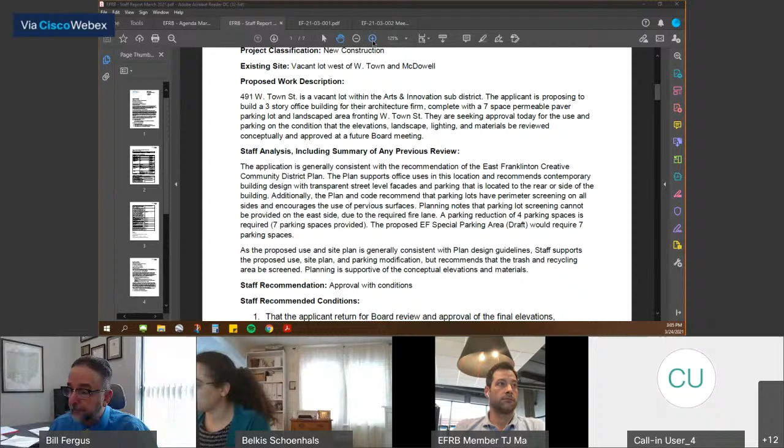The applicant is proposing to build a 3-story office building for their architecture firm, complete with a 7-space permeable paver parking lot and a landscape area fronting West Town Street. They're seeking approval today for the use and parking on the condition that the elevations, landscape, lighting, and materials be reviewed conceptually and approved at a future board meeting.

So if we look at the materials here. Okay, so this is the site along West Town. You can see there's a little alley there, and then right next to the alley is the lot with some mature trees in the background.

So they're proposing to take away some of those trees to make room for the development. They did have an arborist go out to the site to see if any of the trees would be feasible to be saved, but unfortunately, with the construction of the parking lot and the construction equipment, it would actually hurt the root system and they can't be saved. Also some of those trees are invasive species, so we assessed that in this case it's all right if they are removed and not saved.

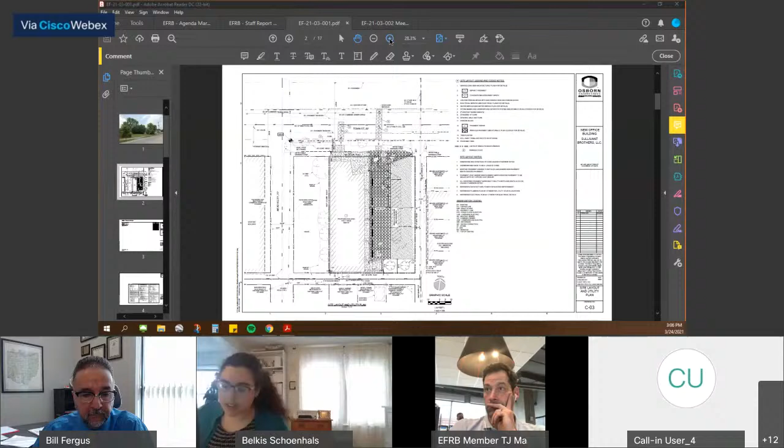Could we go to the updated site plan, please? Great, and then can we zoom in on the footprint? Awesome, great, okay cool. So on the left-hand side there you'll see the outline of the office building, and then on the right-hand side, with kind of that square pattern, those are the permeable paver parking lot spaces.

Essentially, folks can come in off of the alley and park on the side there. And then you'll see a little square pattern triangle fronting Town Street, and that's going to be a landscaped area with some trees and a bicycle parking rack. Can you scroll down a little bit, Nolan, so we can see the southern portion? Yeah, and then in the rear there of the parking lot, you'll see 2 new trees that are going to be planted just for some screening and buffering.

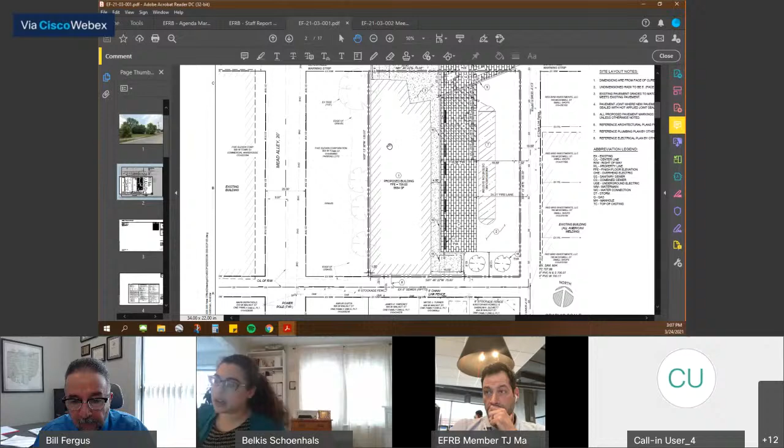And then can you go to the drawing set, please? Great, and then if you could go to the floor plan.

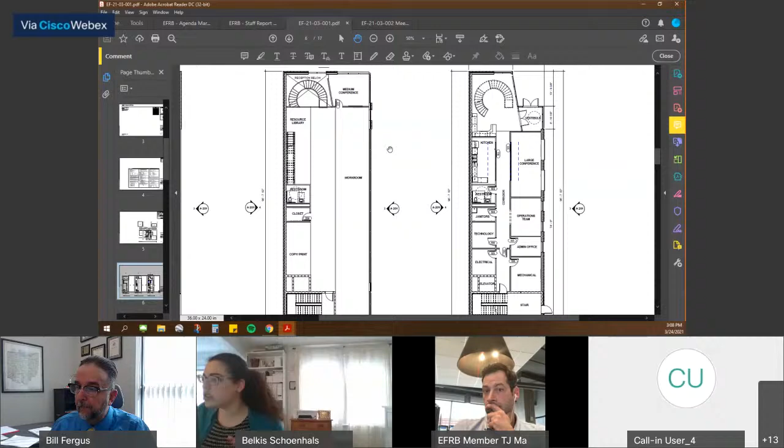And keep going. Yeah, so these are the floor plans. It'll be a first floor, second floor, and then like a mezzanine level. So you can keep scrolling through.

Great. Okay. Perfect. And then can you zoom out so we can see the whole page?

Great, so here are some views and elevations. And again, these elevations and materials are still conceptual at this time. What the board is voting on today is just the site plan, so that would be the parking and the use. And then can we go to the last page?

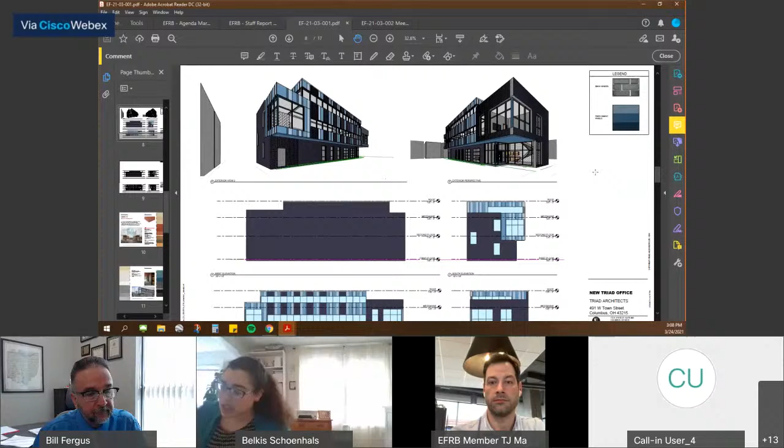Great, and then here are the other elevations as well.

Thank you. So after review, the application is generally consistent with the recommendations of the East Franklinton Creative Community District Plan. The plan supports office uses in this location and recommends contemporary building design with transparent street level facades and parking located to the rear or side of the building.

Additionally, the plan and code recommend that parking lots have perimeter screening on all sides and encourage the use of pervious surfaces. Planning notes that the parking lot screening cannot be provided on the east side due to the required fire lane, and a parking reduction of 4 parking spaces is required.

7 parking spaces are provided, and the proposed East Franklinton special parking area draft would require 7 parking spaces.

As the proposed use and site plan is generally consistent with the plan design guidelines, staff does support the proposed use, site plan, and parking modification, but recommends that the trash and recycling area be screened.

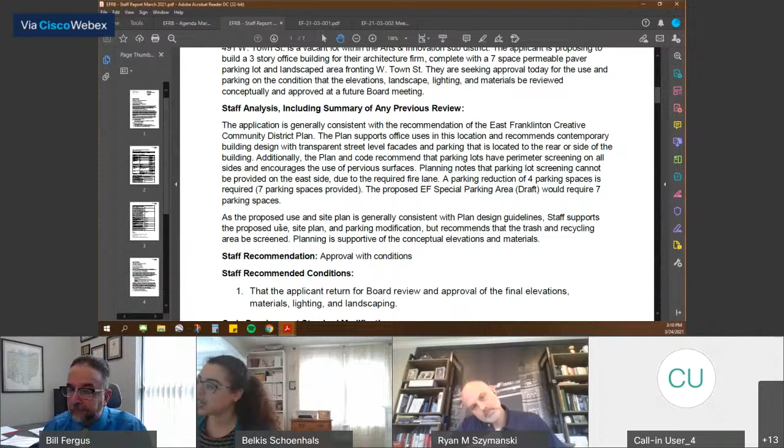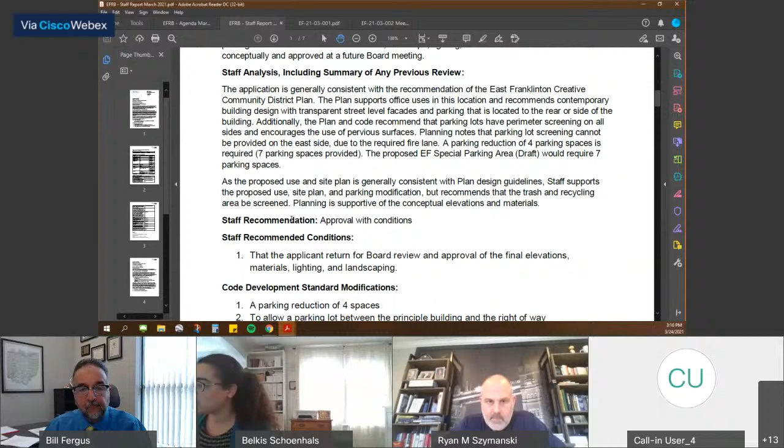Planning is supportive of the conceptual elevations and materials, and staff recommends approval with conditions, with the condition being that the applicant returns for board review and approval of the final elevations, materials, lighting, and landscaping.

Some code development modifications that would be approved if the board approves this today would be a parking reduction of 4 spaces to allow a parking lot between the principal building and the right-of-way, to allow no parking lot screening to be provided on the east side of the parking lot, and to allow building frontage to be less than 60% of the frontage.

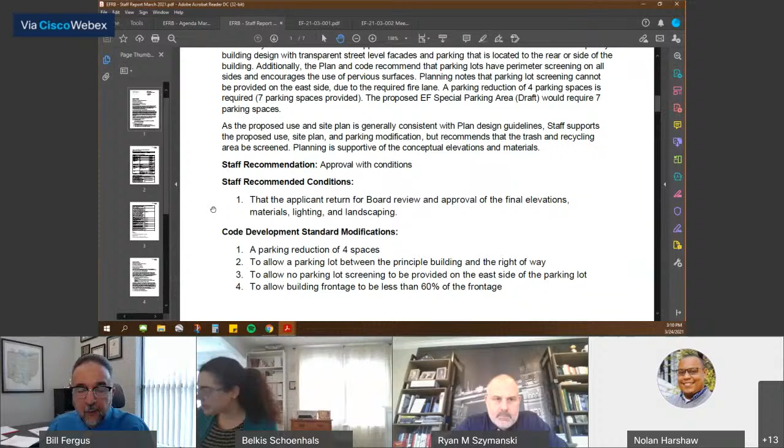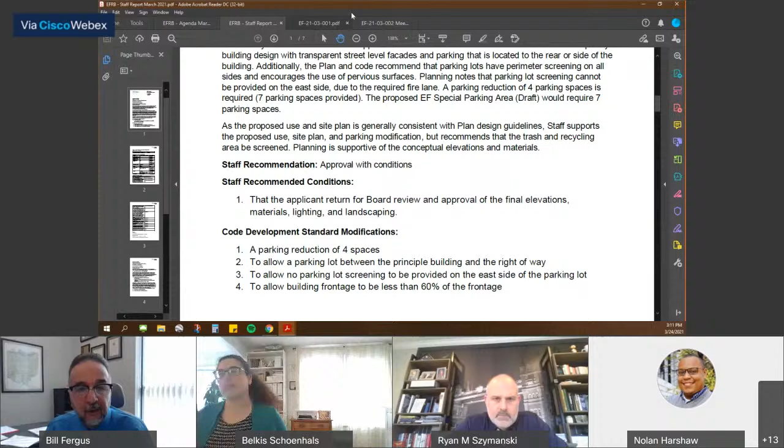Yes, this is Kevin Kindy on behalf of Triad Architects. This is Kevin Kindy from Triad Architects.

Are you the only one who's going to testify today? We have Brent Foley from my office as well, but he's here more on the owner's hat, if you want to call it that. I'm sitting here on the applicant and architect hat. My business partner Zach's here. Maybe we should just go ahead. You're going to swear us in just in case, is what I'm getting at, right?

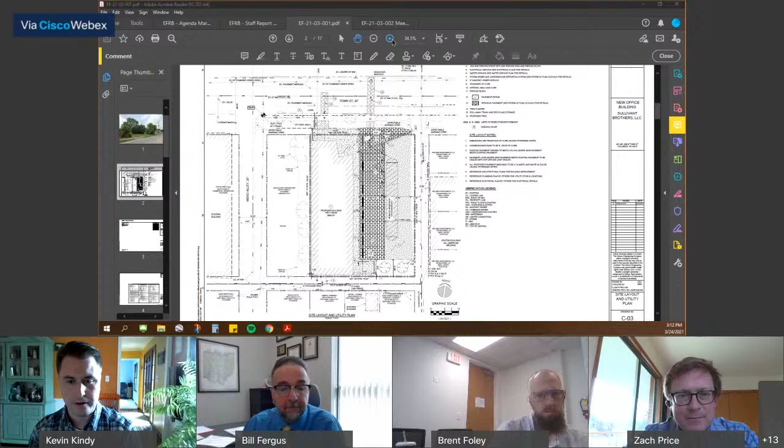I think the only question that I had at first on one of the conditions, I don't think it was necessarily a condition, but it was a recommendation to screen the trash area.

So on our site plan, it's shown kind of generically, it wasn't called out very explicitly, but we do have a dashed line box with note 15 at the south end of the site there.

Our intent is to have that be basically a small fenced in area. We're not planning on a dumpster because we don't generate that much trash as a business. We're planning on rolling containers similar to what residential would use, probably 2 trash, 2 recycling. So not a huge enclosure, but we are planning on screening it in that fashion.

So our question in relation to that is just whether or not that would be deemed acceptable. And then the other point I'd like to make is we are currently showing, and the site plan reflects, pervious unit pavers for the parking stalls.

We're currently working through some budget review with a contractor that's currently about a $20,000 add overall for this project, and we're currently over budget. So we're looking at kind of a base bid scenario of doing the entire parking lot out of asphalt, with an alternate, if we can afford it, to use the porous unit pavers in the parking stall area.

It's definitely our desire to do so. It's just whether or not it's more of a want than a need at this point. If we can afford it, we definitely would like to do it, but ultimately we've got to make the whole budget work. And I think those are the only 2 things I've got at the moment.

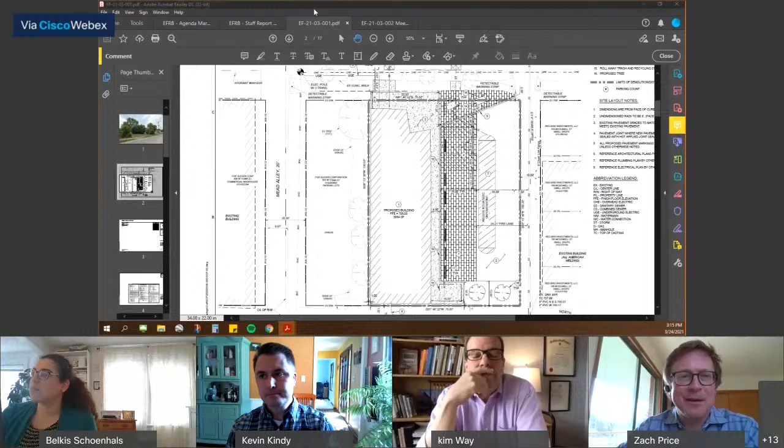Yeah, okay, I can answer some of that. This is Zach Price. We purchased this property about 6 years ago as a bit of an impulse buy. We were interested in Franklinton as an area of Columbus to do a project, and looked at numerous different uses for this property, none of which really made economic sense until we needed more office space for ourselves. So to answer your question about fronting the building completely on Town Street, we did look at that. However, we felt it wasn't going to result in as much usable square footage for us on the site and wasn't going to increase our parking count.

So it was less favorable than this current situation. It would have made it easier to front the entire building on Town Street had we been able to acquire the corner lot on Mead Alley and Town Street there. Over the years we've had numerous conversations with that property owner, and it's a very complex ownership arrangement—that owner also has that property commingled with properties to the west on the next block. So it really just was not something we could acquire, unfortunately.

Yeah, that's the part I guess I have the most issue with—I would love to see that be a consistent edge along Town Street, but I understand you've got a site and you've got constraints.

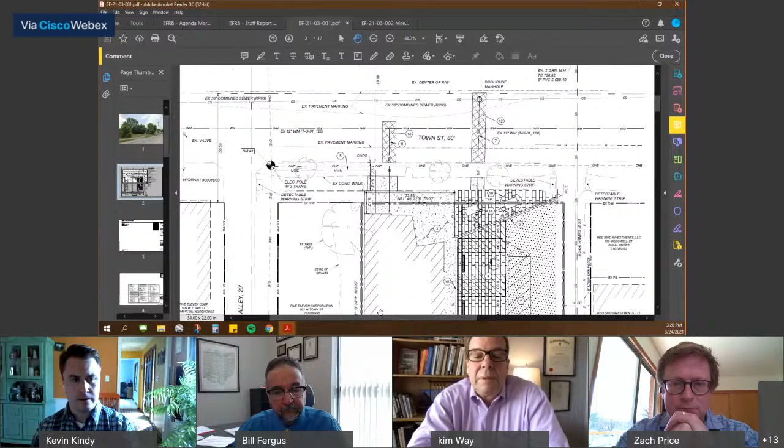Yeah, that's a good question. I think that was a similar comment, not necessarily a condition, but it'd be great to get more feedback on what the EFRB would require for landscape screening. I'm assuming that's what we'd probably be looking at doing there. Like I said, we do have two trees, but I know that's not necessarily the opaqueness that's desired. So I think we're open to discussion on that.

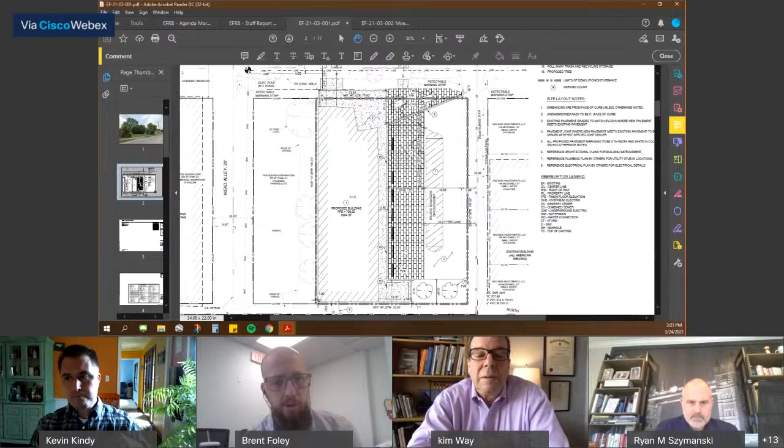Kim, if I could interject something to help you understand how we intend to use some of the parking lot in an additional way. Along the east side of the building, in our conference rooms and front ground floor area, we intend to have glass garage doors that open up to the parking lot. That's why we were interested in doing permeable pavers on that portion, so during things like Franklinton Friday we could close our parking lot off and have events, plugged into what's going on in the community. So I think we should consider whether that plays into whether there should be too much opaqueness in that screening, to have it be inviting.

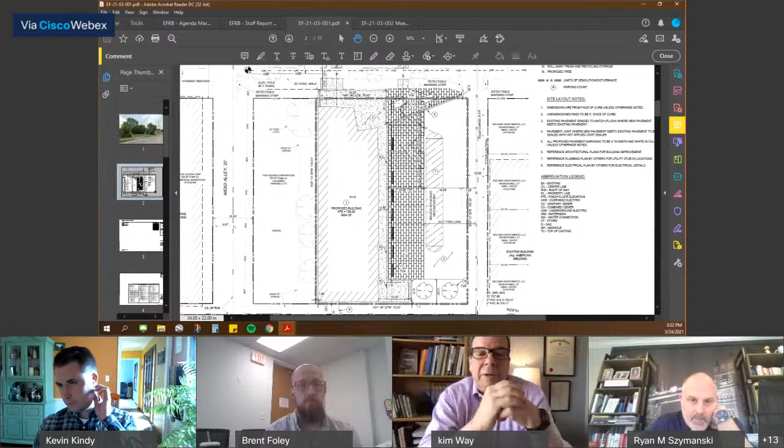I just think it would be a really interesting move to almost pick up on that entrance angle and extend that as a wall across to screen the parking, and give some enclosure to that front plaza, while also screening the cars. I don't think you're totally closing off the space—I think it could still be used, but it might give that architectural continuity that I'm kind of missing.

Yeah, it seems like they're sort of doing it. You're sort of doing it. I mean, we're not really talking about the design of the building other than the footprint, but the idea that the entry is at the end of that canted wall—it could be nice as a screen wall or signage, but that's for development, right? Yeah, that's what I'm saying, Bart. Yeah, I mean, I get the angled wall trying to line up with the angled entrance.

Yeah, and Ryan, even the trees in the back that are shown there, I don't know what they're doing. That's the alley, right? I'd rather push everything back to the alley and pick up more usable space on Town Street, like you said, and really treat that as a nice little urban space, and screen the cars.

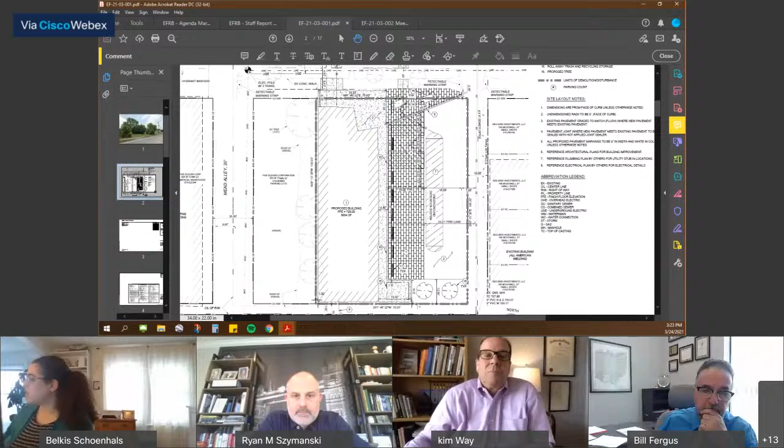Yeah, I think we could look at moving it back. We'd have to figure out how the trash enclosure works, because that's obviously something we don't want up near Town Street. But if there's room for it in that southeast corner, that might work.

But I'm just wondering, that trash enclosure looks like it's two wide by two deep. I wonder if it could be longer, so you're pushing those rolling bins into there, which allows you to get the space you need to push down a little bit. It might only get you a few more feet, but it looks like you have plenty of space within that parking field.

We are certainly open to these continued conversations. For the purposes of our approval today, I just want to clarify: if we get approval of the parking number and the use, we'd be happy to continue to tweak those things with you guys when we come back for the building elevation.

This is staff, just to jump in here and contribute. Staff fully intends and supports screening on the West Town Street frontage as well as the rear of the parking lot. The only modification we're proposing is for there not to be screening on the eastern portion of the parking lot where the fire lane is, but we fully intend on screening being on the front and rear of the site. They are going to come back at a future date for landscaping, and that's where we would expect that screening to be shown in detail.

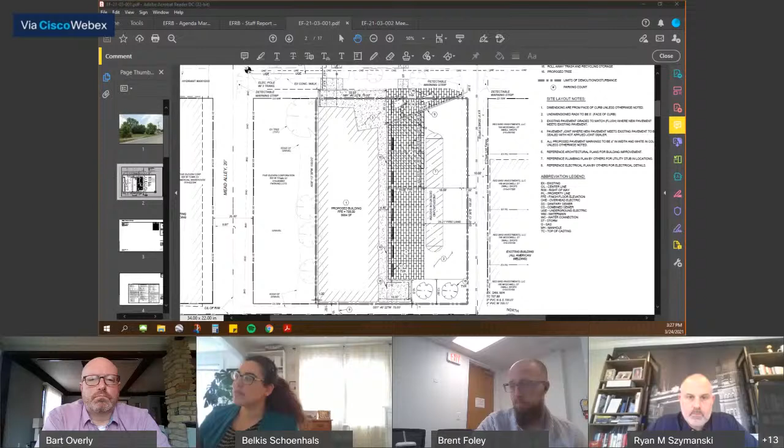So effectively, we would be giving preliminary approval to the site plan. Correct, yes, to the site plan, and so that's the use and the parking count.

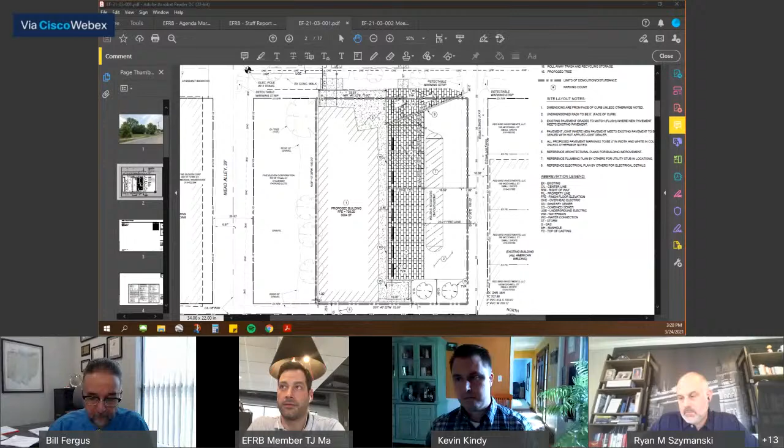Are you planning on designing your underground detention system with the assumption you are not going to have permeable pavers? And then if you do, all the better? Likely, yes. The amount of permeable won't be as big a change in this instance for this size lot, so that's probably how it's going to go.

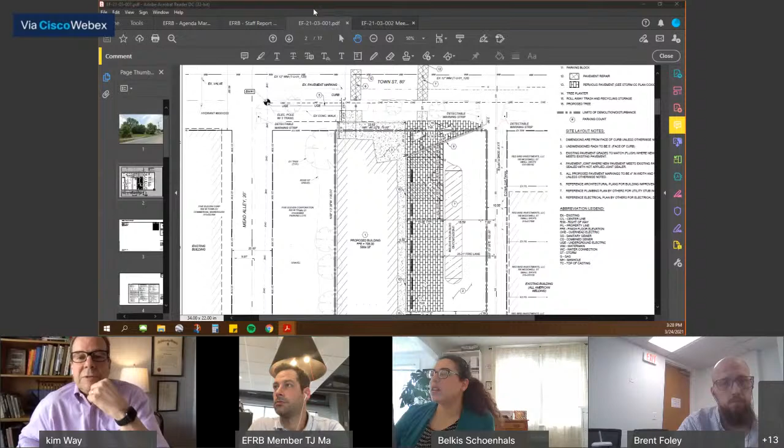So Belkis, I just had a question about the parking. I noticed in the documents online there was a graphic showing additional parking over in the parking garage owned by the development down McDowell Street, River and Rich. Is that correct? So the plan is that they have spaces in another parking facility.

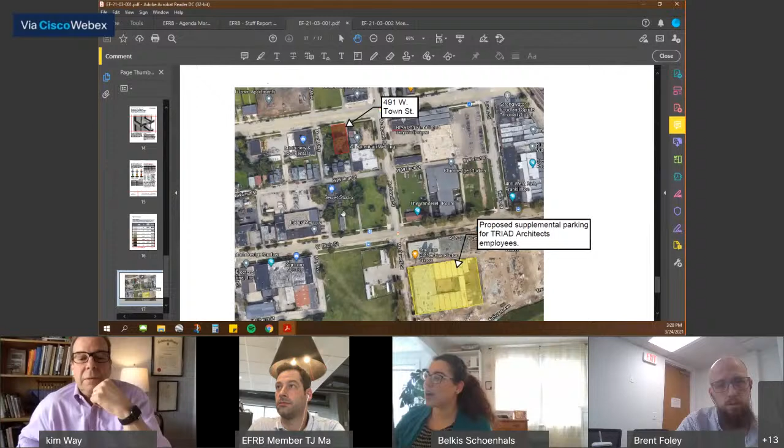Proposed supplemental parking. To my knowledge, the applicant was just pointing out a different parking option. I am not aware of any specific spaces reserved for Triad in that parking garage. I think they're just showing where parking is close by, but the applicant could probably clarify that.

Yeah, I can jump in, and maybe Zach can too, but that's our intended location for any additional parking we need for employees right now. We would negotiate that with them. There's also the Gravity site that's a little bit farther away and across Broad Street, and there's conversations about the site on the other side of the railroad tracks that could be potential. We're working through that—we kind of prefer this one for our location, but we can't guarantee that yet because we're not in an agreement with them yet.

So Brent, you're looking to have reserved spaces specific for Triad in one of those locations? For employees, correct. The site and the parking spots on your site would most likely be for guests and clients coming in. Correct.

So where I was going with that question was, if you had one less parking space on site and could pick up some more outside area, if it helped you with wiggle room to make things work right, that would be something else the board could discuss, but I'm not proposing that.

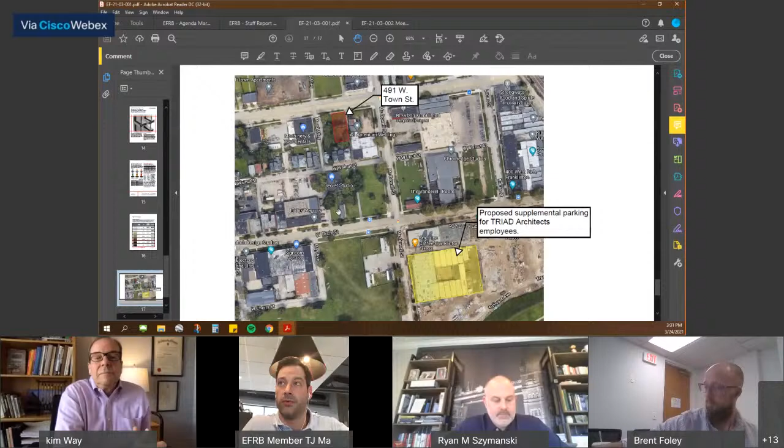Kim, that's a great point. When do approvals need to necessarily happen for parking, the city's buyback program for parking spots? When does that go into effect? The East Franklinton special parking area?

Correct. So that passed Development Commission. I believe it's going to go on to City Council in April, but they have to do 2 readings before it goes into effect. I'm not sure if it's 2 readings over 2 months or within 1 month, but I'd say that program might take effect by the end of April or May.

But I would need to touch base with Jackie Yeoman on the exact timing of that. She's the go-to.

So if we were to approve a reduction of 4 spaces today or 5 spaces today, there's no cost involved, despite the fact that their site plan has not been officially approved and the building itself hasn't been approved, but they'll be kind of grandfathered in over the next few months now that they've reached out to us and had our approval on parking.

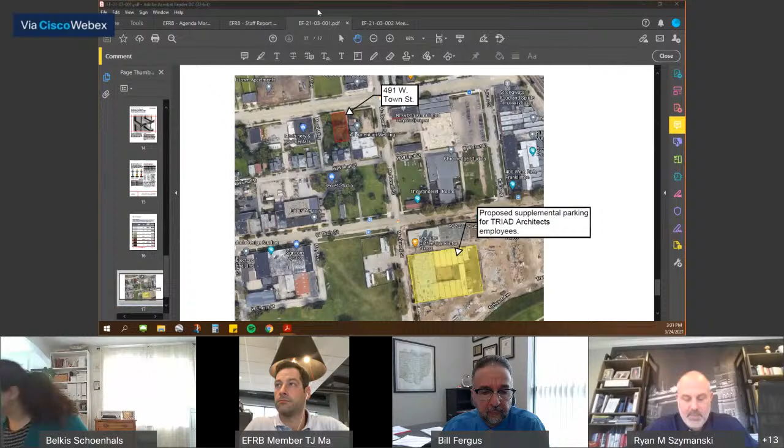That's correct. I guess I'd prefer to see the 7 in line with the East Franklinton plan. There's plenty of room up front there and in the back, in my opinion, to get proper screening and landscaping, and set precedent of already reducing from that East Franklinton plan when there's a plan in place that can meet it. I'd prefer to see it kept at 7.

But that's an issue for today, correct? Belkis? Yes. So that modification would need to be approved today. So we need to pick whether we're allowing a 4-space reduction or a 5-space reduction today.

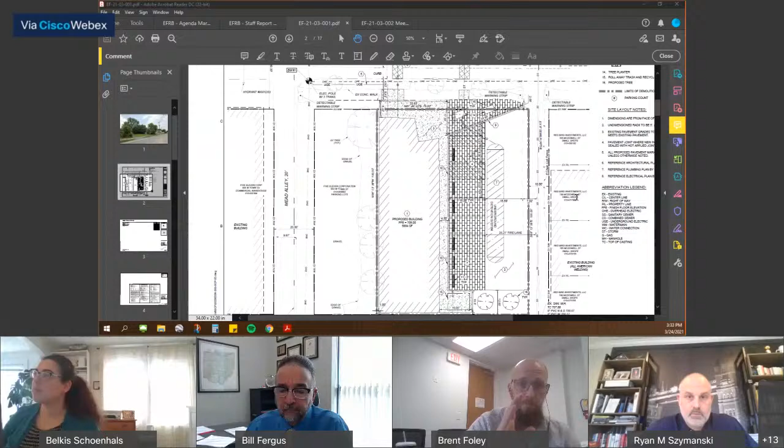To clarify, we've asked for a 4. If the board prefers us to go for a 5, and you're going to approve that, we would be okay with that as an applicant. But we've only asked for the 4, which is in line with the plan. Okay, very good.

Is that a two-way alley to the east? No, I don't believe so. Yes, I believe it's only 1 car wide. It's a 10 foot, 1 car wide.

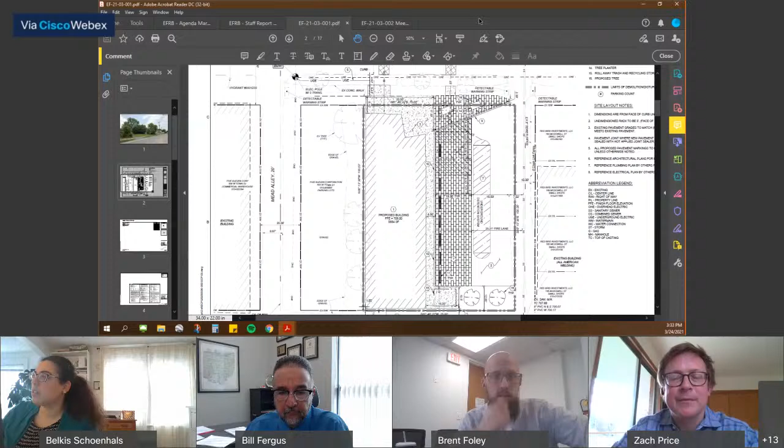Is there any benefit to angling your parking spaces as you pull in from town, putting those at an angle with your retaining wall or with your curb wall there? Potentially. We certainly could look at that in the final plan.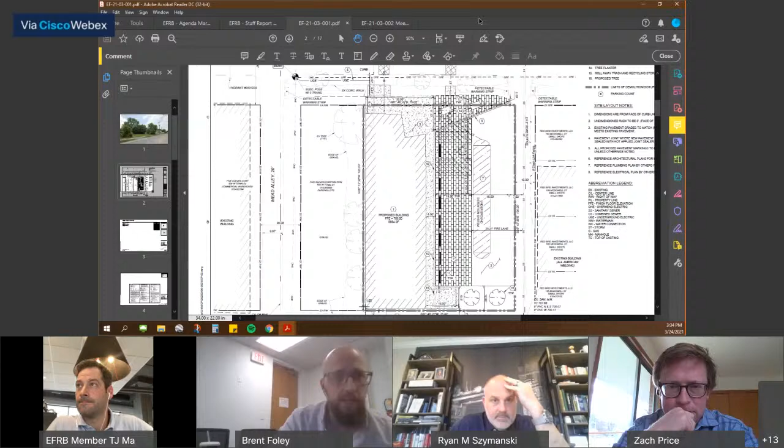This was kind of dictated to us, Kevin, correct me if I'm wrong, from site compliance from our preliminary review, right? Yeah, we didn't talk specifically with them about angled parking. I know with the straight parking, if you count the leftover space, our civil engineer dimensioned it at 25.21 feet fire lane. If the angled parking is longer than straight parking, I don't think we'll have enough space left over to do our fire lane. So that would be the only key consideration for that.

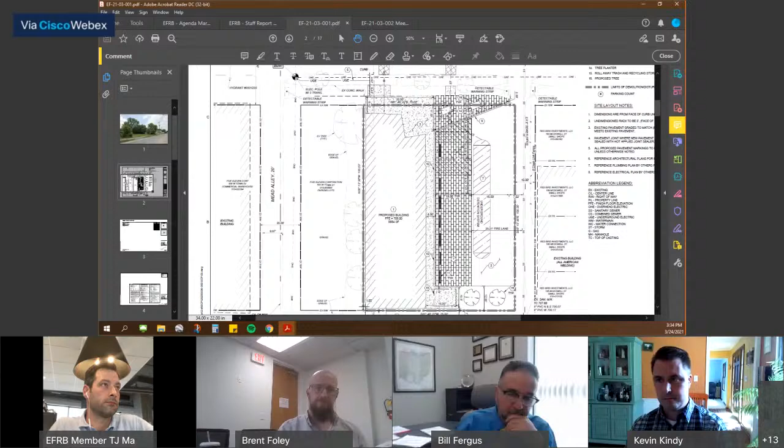Good point. So I'm counting 7 wheel stops, but that top spot, is that a handicap spot? Is that, why is that? Correct. It looks like it's a lot wider than it needs to be.

It looks like you've got a bunch of space in there. Kim, that was my point of why there's plenty of space to have 7. Yeah, I'm just having trouble reading what's a space and what's not a space. Yeah, it's a van accessible space.

So there's a crosshatched area just to the north of it, and also a crosshatched area to the south of that accessible parking space. The one to the north is a little bit wider than it needs to be. You can see there's a 5-foot dimension there to the corner of the curb, so that's the minimum required on that side. The leftover, whatever it may be, 6.94 feet, is additional. Are you required to do a van space versus just a regular space? Yes. Okay.

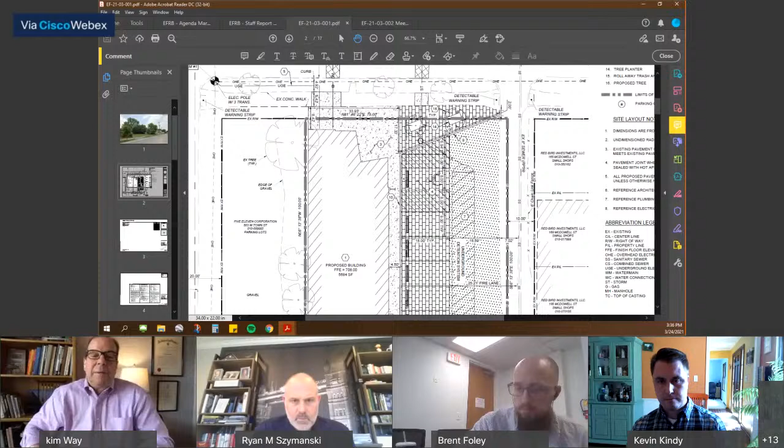The first one has to be a van, Kim, and then you can get some beyond that. I'm not sure we had seen that before, but maybe we have. I would move to approve the use and the reduction of 4 parking spaces at this time.

And Kim, to your point, if in the future when they're doing their site plan they can come up with a better site plan that includes screening and the comments other board members have made, and at that point it's helpful to possibly reduce the parking by another spot, I'd be open to at least hearing or understanding that, if it substantially improved the screening and the overall aesthetic.

Before we go any further, TJ, staff did recommend some conditions to this approval, that the applicant returns for review and approval of final elevations, materials, lighting, and landscaping. Would you care to add that to your motion? Yes. I do not believe that our approval today is for the entire project, it would just be for approval on use and parking reduction. Understood, got to make the record.

Good, Belkis? Yes, thank you. I have another question, if I could. You said that you would just approve the screening, is that what I heard you say? No, so I would look for the final site plan. I would look to ensure there's screening on both the west town frontage and the rear of the site, because today we would only allow for screening not to be on the east side, as presented.

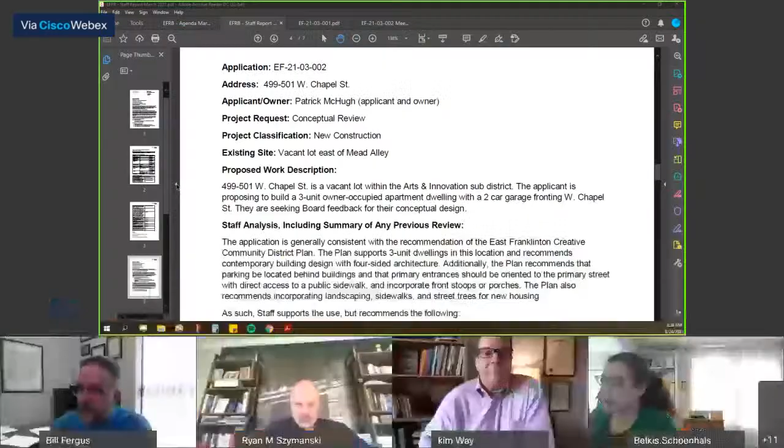Okay, so we have one conceptual application today. It is EF 21-03002, address 499-501 West Chapel Street. The applicant and owner is Patrick McHugh, and we're reviewing new construction of a 3-unit owner-occupied dwelling. Belkis, staff report please.

Belkis, before you start, I want to make sure to announce my recusal. I've been giving him kind of advice moving forward. He's also within a 300-foot radius of my property as well, so I will. Okay, what's my recusal mode here? Do I turn off camera and turn off speaker? Exactly, yep, just put yourself on mute and turn off your camera. Thank you, TJ. You're welcome.

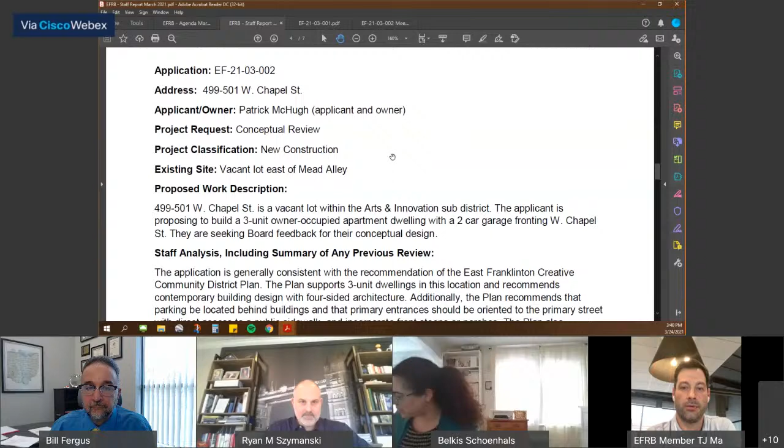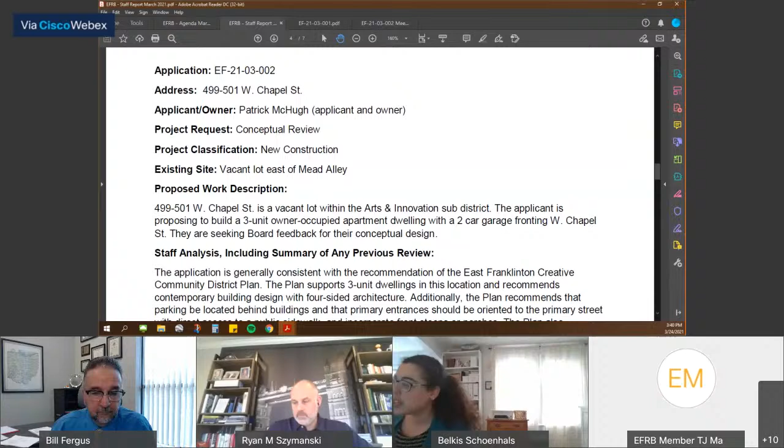Okay, so 499 to 501 West Chapel Street is a vacant lot within the Arts and Innovation Subdistrict. The applicant is proposing to build a 3-unit owner-occupied apartment dwelling with a 2-car garage fronting on West Chapel Street. They're seeking board feedback for their conceptual design. And if we can pull up their materials.

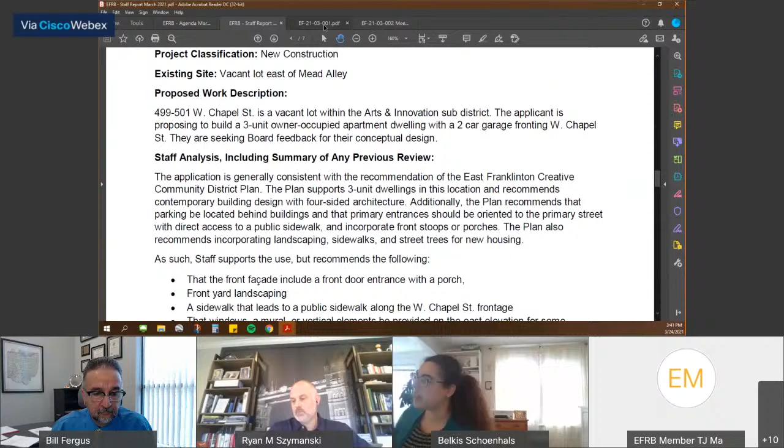Or first the Google Street View, actually, if we can do that. Great, so this is the lot here. So really the lot we're talking about shoots back from these 2 sidewalk pieces back to where those trees are, so that's what we're talking about here. Great, thank you, Nolan. And then if we can go to the drawing.

So again, you have the floor plans there, which cover the 3 dwelling units. And then you have the garage fronting Chapel with a balcony on the 3rd level. And then you have 2 views, kind of 2 elevations with the conceptual materials.

The entrances would be on the east side of the lot, and then that large blank wall would be along the alley side of the lot, the west side. So you can just leave this up for everyone to view.

After staff review, the application is generally consistent with the recommendation of the East Franklinton Creative Community District Plan. The plan does support 3-unit dwellings in this location and recommends contemporary building design with 4-sided architecture. Additionally, the plan recommends that parking be located behind buildings and that primary entrances be oriented to the primary street with direct access to a public sidewalk and incorporate front stoops or porches. The plan also recommends incorporating landscaping, sidewalks, and street trees for new housing.

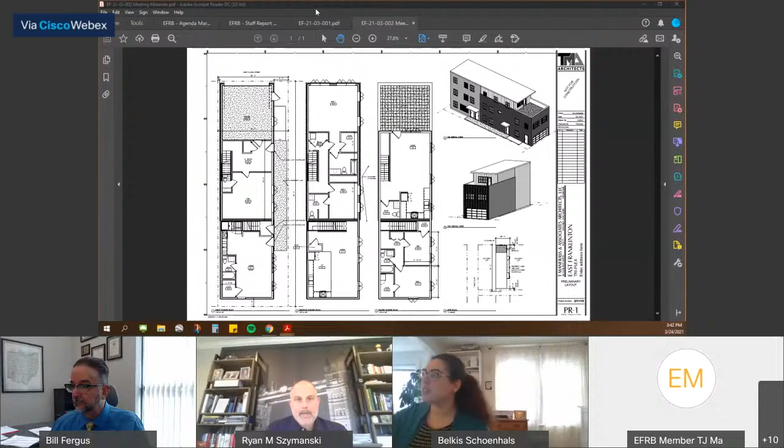Okay, Belkis, was there a site plan with it? Was there a drawing before this? I'm not sure I saw that. No, this is it. I think they tried to do a site plan in the lower right-hand corner there. Obviously, we'd want to see something more robust and detailed for any final drawings, but since this is conceptual, this is what they have at this time.

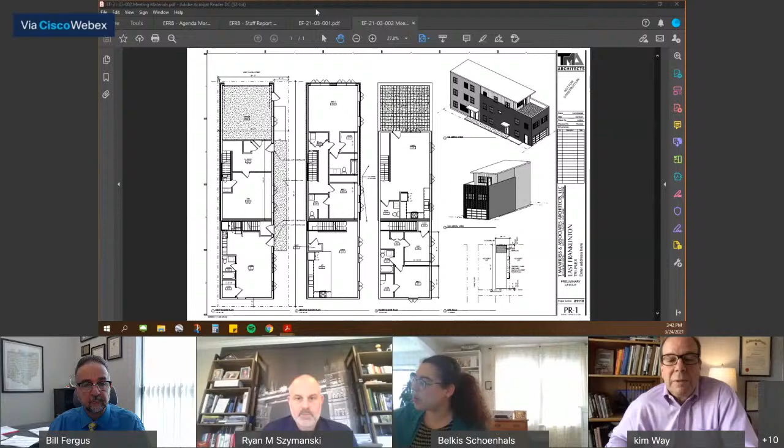Is it possible to zoom into that corner? Yeah, can you zoom in on that piece? Great. You couldn't see that, Kim? Not on my tiny little Apple MacBook Pro.

So you said there is no alley. The alley doesn't exist, is that correct? Yeah, exactly, it doesn't exist. It's not visible to the eye, it's overgrown. But you see it on a map.

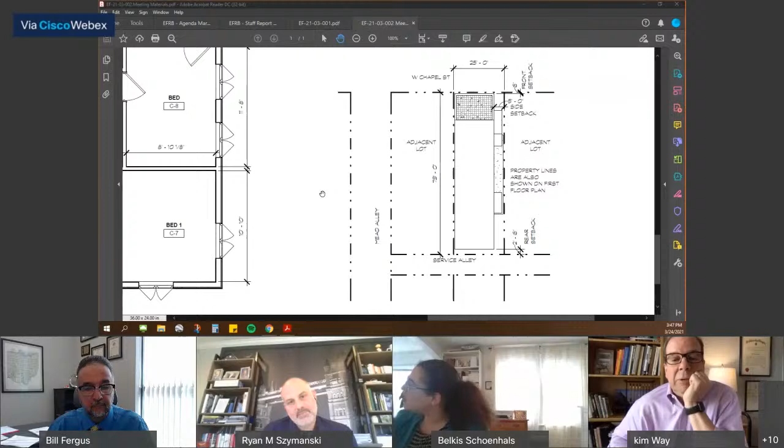But it could be improved and used for rear access to a building like this, right? But it's not vacated, right? It's a paper alley, but not vacated. That's what I'm trying to understand.

I did speak to public service. There's a gentleman there who deals with anything regarding alleys, and I spoke to him about it. He said that in these types of scenarios, they would put development of the alley on the property owner or owners, if they want to group together and do something like that. Then the city would be the one to maintain the alley after it was developed by the property owner. So that's kind of where that falls.

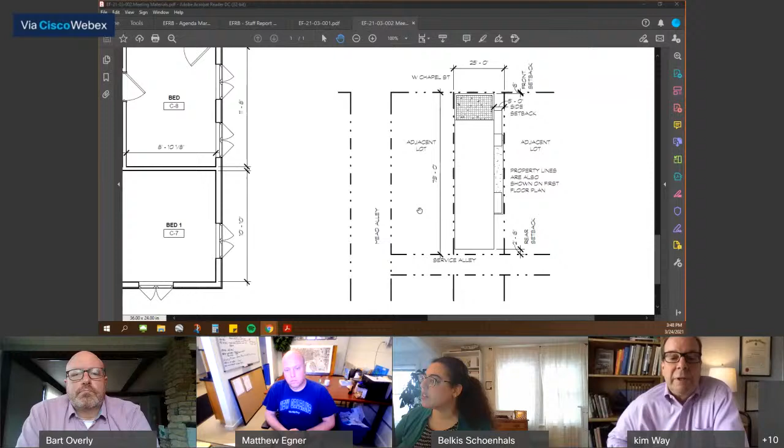So in essence, a driveway could be constructed from Mead Alley, or from the other side, to provide rear access to parking, and if the landowner wanted to pay for it, it's possible. I wouldn't call it a driveway, I would say they would construct part of the alley so they could get rear access to their property or to their lot.

My point is, it's no more than a driveway you'd see anywhere, maybe 12 feet wide or something, so it's not a huge cost to construct something like that. It seems like rear access would make the most sense, and if the other landowners on each side participated, that would be ideal. But I still struggle with the front loading parking.

It just doesn't seem... Staff's preference will always be that parking is accessed from the rear of the property. We understand there are some site constraints with this one, but that's our absolute preference. Again, noting the precedent this would set if parking were accessed from the front, and furthermore a new curb cut would need to be developed along Chapel for that front-facing garage.

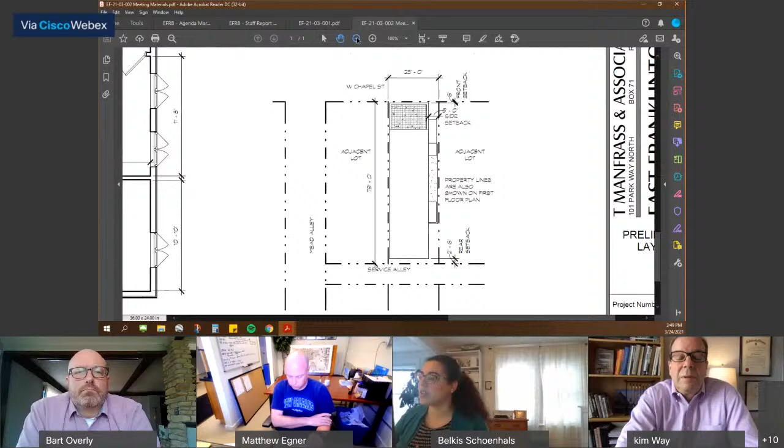So it'll always be our preference to find a solution to locate it in the back. Because every other property would be exactly the same way, you'd get rid of all the street parking, the sidewalk. I agree, so the cost of that would set a strong precedent.

So the reduction in parking and surface area you'd have to pave for parking could go into the construction of the alley, in essence. I can't really speak to cost, but potentially.

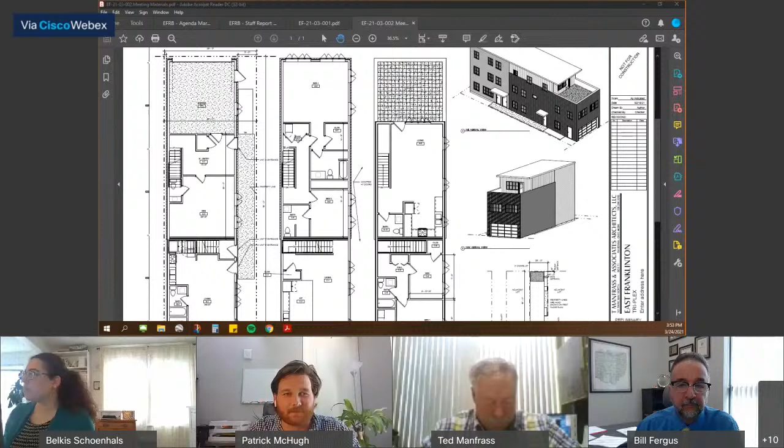The floor is yours, this is a discussion format, so feel free to discuss. Okay great, I'll kick off with a little background. I came across this land back in December of 2018, that's when I closed on it, when I was moving back to Ohio.

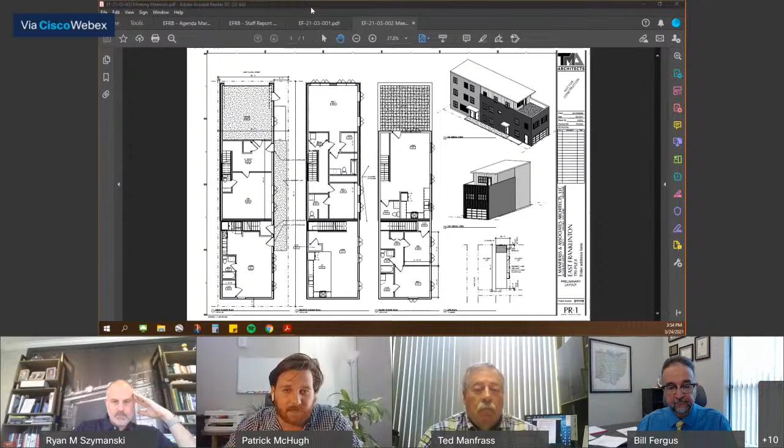Since then, my fiance and I have been saving up to start this build process. We actually live over in River and Rich right now, so after 2 plus years, we're ready to move forward with building on the lot. The initial plan, open to conversation, is kind of a warehouse feel with the neighborhood, but then made to look more like an addition, some Hardie board or whatnot. It would be a 3-unit owner occupied building, as Belkis mentioned.

And then in terms of some of the items talked about, the alley was a big thing. I also reached out to the city, and they said the same thing to me, that paying for the alley, because it's a 10-foot alley, would be my responsibility. I know you mentioned some of the other landowners around. I know we have Dewey Stokes on the line. He owns 6 of the 8 total parcels on the block, the 2 immediately to the east of me, and then the 4 along Town Street. And then Nationwide owns the parcel immediately to the west of me on Mead Alley.

But the reason that the parking garage, the initial designs, was because of kind of the alley restriction as well. But we did look around the neighborhood. I know there's even pretty close, right around the corner of McDowell, a property with a garage. That all played into that initial design.

As far as the parking goes, I know we have 2 spots here. I'm kind of limited with my 75 feet by 25 feet, and so one of the requests I would have would be on a potential parking reduction from 3 spots to 2 spots, pending future design, obviously.

And then I think there was also a mention of that west wall and the architectural relief. The initial plan is, given that we are in the Arts and Innovation District, would be to potentially commission a local artist to paint something more colorful or tapestry-like, kind of like what we see around Brewdog or Chrome Edge, to help brighten that up, knowing that Nationwide currently owns that lot directly to the west, and perhaps that gets covered up if they move forward with any designs on that site.

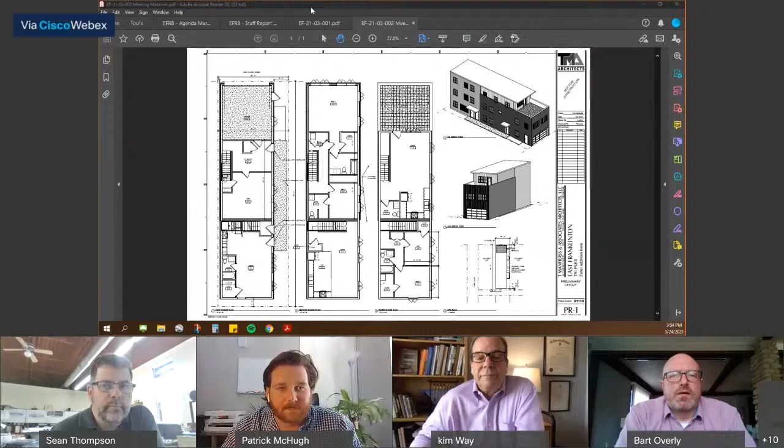So your building is about 20. It's 20 probably, from the interior walls, I believe. I think it's about 4 feet. Again, Sean, correct me if I'm wrong here, for the sidewalk on the side, on the east side, for the entrance, I think it's like 19 foot, because we tried to keep 5 foot.

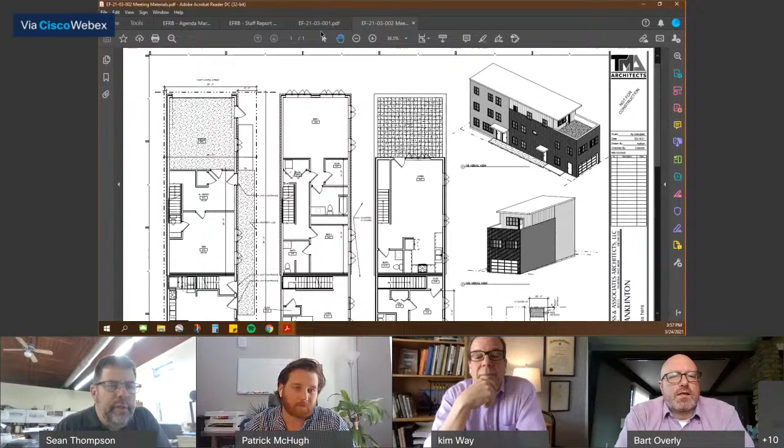If you zoom in that upper left-hand corner, we tried to keep 5 feet off of the east property line so that we could extend the sidewalk out to West Chapel. And then if we're 5 feet back, we don't have to worry about fire ratings of windows, and can introduce more glass on that east side. Yeah, we're 19.6 outside to outside.

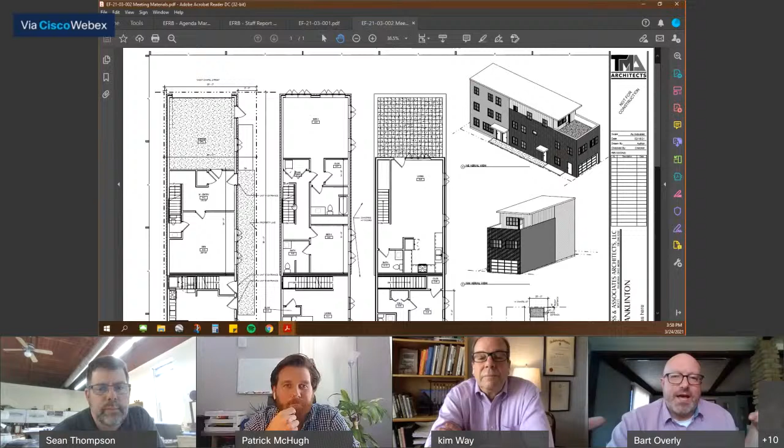So obviously the issue is all of these other properties, as they develop, while I kind of like the little warehouse chunk that fronts out on Town Street, I just am really worried that it's going to set a precedent of all of these other small lots wanting to do garage front and basically eradicating the street frontage, parking, tree lawn, all of that would be taken away in this area.

So it does seem like flipping this, keeping you could still keep the idea of the terrace in the front on Town Street, which is nice, but basically wondered if you did look at flipping the garage to the back and utilizing that paper alley.

Yeah, I'm certainly open to that, as well as any other feedback. I think we wanted to get the conceptual in front of you before I dove too deep with the architects in terms of aesthetics as well. But I think I'd be happy to entertain that and talk through that, as long as... the parking was my biggest issue with a lot this small.

Just so the rest of the board knows, I don't interject my opinions too often here. I'm the chair and an attorney, so I know precious little about architecture. However, I do know about precedent, and as the board also knows, I am quite reluctant to establish precedents that could be adverse in the future. I think I would agree with whomever said that approving a front load garage in this circumstance is most likely setting a precedent that will cause us a lot of trouble in the future. So I think we need to see that turned around, from my perspective anyway.

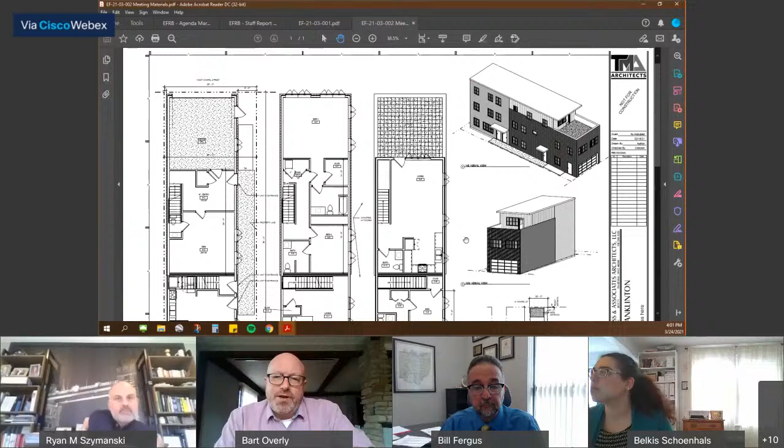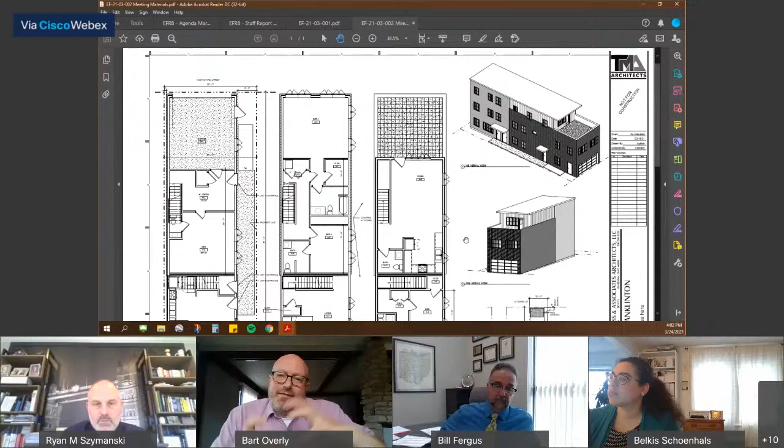I think it also would be cleaner if you thought conceptually about this as the warehouse building in front, so it would have lots of glass and light to Chapel. And then you have this, I don't know, the flat roof - it seems like it's too much like the warehouse. Maybe it could be more like a shed roof or something so it looks like these two buildings overlap. But I'm looking at your east elevation, it looks like you're splitting that building into three materials. I think it'd be maybe more interesting if it was just like one building living inside the warehouse, sort of overlapped. It's simpler. I like the simplicity of it. I think it could just be a little simpler.

Matt, Judy, do you all have any feedback or comments? So I would just be in agreement about the garage not being up front. I'm a little surprised the city doesn't pay for those alley improvements, but yeah, I don't think having a garage onto the front edge there is a good idea.

I agree with that, and I have a question. I'm a little concerned here - I live in a neighborhood where you've got a 10-foot setback, which clearly you can't do in a 25-foot lot. But we look like having a whole bunch of shoeboxes lined up side by side. Is that where this is going? And then a garage in front of every one of them?

We're going to put the garage in the back. No, I understand that, and I support that. But my question is that you can't have setbacks - in fact, this one side, I think, is less than a foot setback. Does that mean the next property is basically going to have no room for even gutters? I'm lost on the construction of this.

I understand, Judy. So in terms of the zoning code in the Arts and Innovation Subdistrict, you're basically able to have a 0-foot setback. I do believe side yards need to be a minimum of 3 feet, so you do need some space on the sides, but in terms of the front, it can be 0 feet per code.

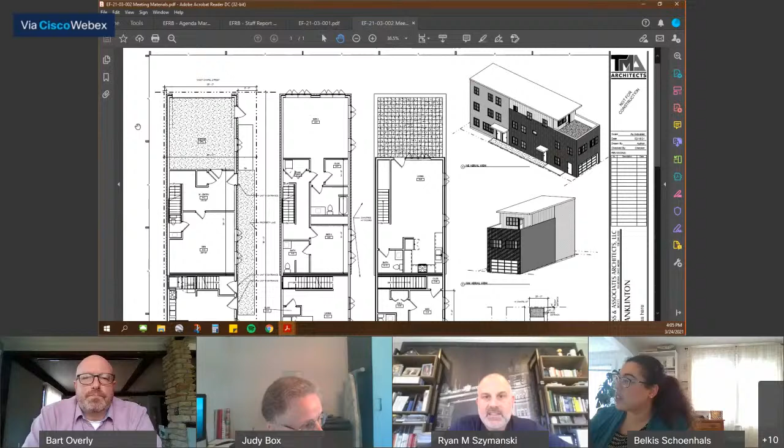Judy's comment is this is drawn at 0 on that one side. If you're saying it wouldn't get approved that way, then we have to give that comment, because that would mean they would need to shrink their building. Let me take a look at the code really quick here.

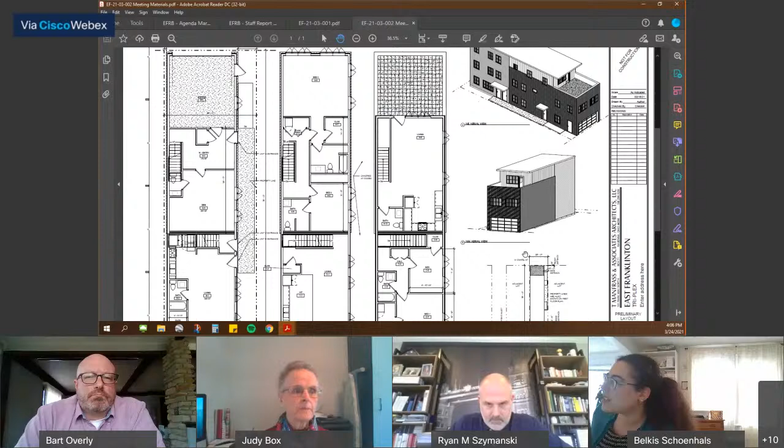Okay, actually, so for the Arts and Innovation District, minimum side yard is 0 feet. So that would be something. The parking setback is 5 feet, but that's for parking lots.

So in answer to Judy's question, you could literally have 5 of these buildings all be 0 lot line, pinned right up against one another, and they all have side yards. They have a big side yard and they're establishing the pattern. The next building to the east is going to do the same thing.

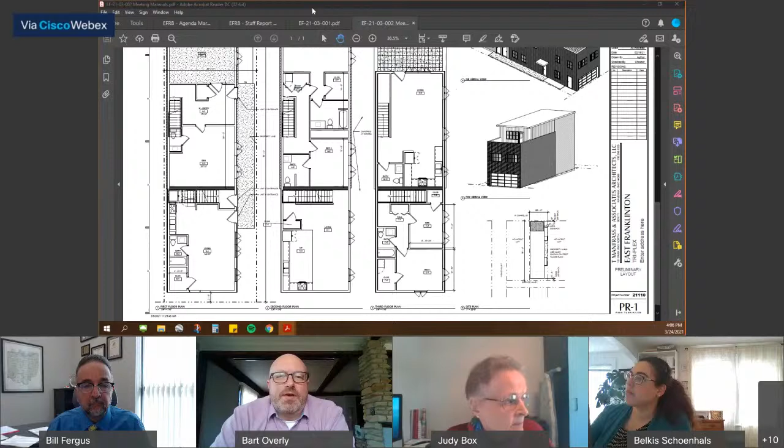And then Nationwide has the property to the... well, they have that little parcel, but they're going to have to do something similar.

We had this in Victorian Village and further north here on Guilford, where every house was on the lot line, and that meant the next house had the side yard, which actually is better than skinny little yards on both sides. It is nice, yeah. I like the side yard.

And we thought that Nationwide, having Mead Alley, could tuck their building up tight against Patrick's building, so that would give them the exposure on the west. And then if the person to the east mirrored, you could end up with a 10-foot sort of yard entry between the two buildings. But again, we're only developing the one lot.

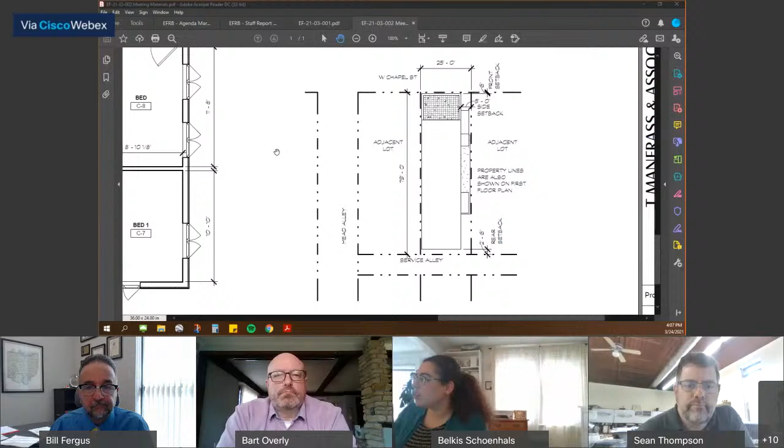Yeah, I mean, I know we're not in Dodge Park. We are in the Arts and Innovation District, and the precedent is certainly concerned with new development. I just do know there's plenty of existing structures nearby that have those garages in front. Just like I said, 75 feet away over on McDowell, 129 on the corner of McDowell and Chapel has the garage right on the front as well.

But I do get that. And as far as the rest of the lots, I know we have Dewey listening in as well. He owns 6 of the 8. Not sure if his plans would develop similar structures as mine, or if it'd be a bunch of shoebox houses in a row. So I wanted to call that out as well.

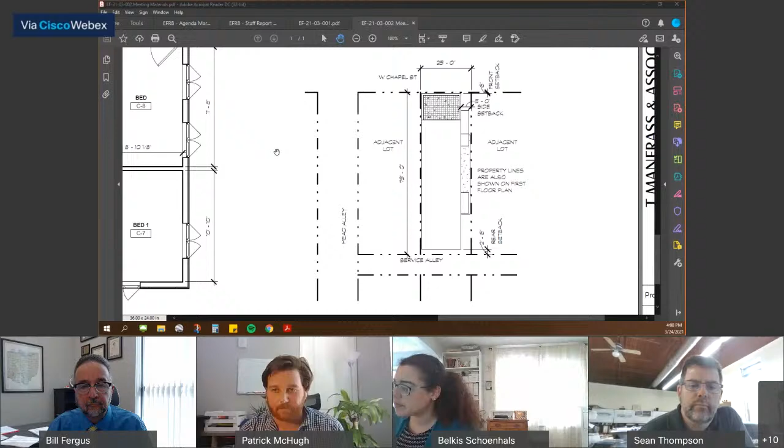What's the building that has the garage on the front? It's not a new build, right? No, it's 129 McDowell on the corner of Chapel and McDowell. So it's a converted warehouse, like a studio kind of look, with the garage in the front. Yeah, converted warehouse. We were established, I'll take a wild guess here, around 2012.

And so anything built prior to 2012 can be non-conforming to the current code. But we have to deal with the code as it is now. And were we to approve a front-loading garage under the current code, that would constitute a precedent going forward. So that's our issue.

Right, correct. And is this more of an urban area? Or sorry, Belkis, go ahead. Oh no, I was just going to say, I did look that address up really quick, and I think Kim mentioned it, but it was originally built as a warehouse.

Maybe it was like a car shop or something, and so it was originally built that way with the existing curb cut. It looks to be a contributing older building, maybe from the 50s or 40s, something like that. So that's actually kind of comparing apples to oranges, because this is a new build for a residential use versus someone who has retrofitted an existing warehouse building that was built for the purpose of having a front garage.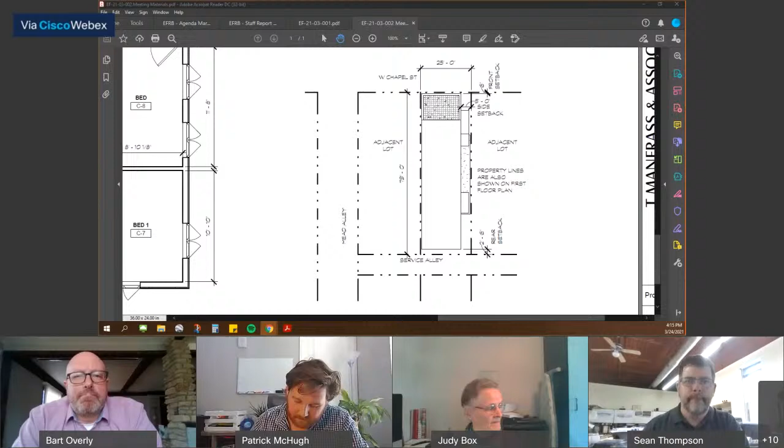Okay, yeah, I think the cantilever would solve the turning radius issue on the ground floor. Just set back the ground floor and then let the upper floors come over it.

Exactly. Ted, John, do you have any comments? Sorry, Ted was muted before. Ted, did you have any other comments?

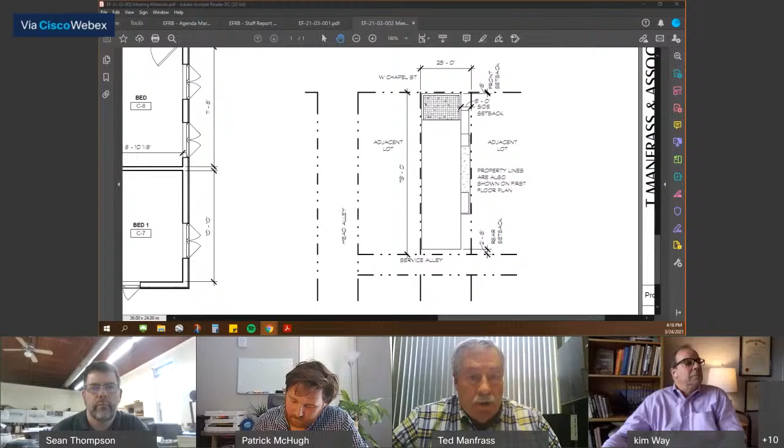Yeah, a couple items. There's no parking on the south side of Chapel. And as you go west from Chapel, past Mead, down past that new development, there is no tree lawn or setbacks all the way down Chapel. In fact, the next building down is the concrete block building on the corner of McDowell and Chapel, and that sits right on the property line also. So, requesting a tree lawn or landscaping.

Again, the question is, this is not a residential zone, this is a commercial zone. I understand where you want to be, but most of that is appropriate if you're doing 150 feet and you've got multiple units and you can do things. But when you're dealing with a 25-foot wide lot where you can barely get a 19-foot wide building on it...

And that 10-foot service alley in the back, the city of Columbus has sent Pat the specifications. That has to be upgraded to the city of Columbus standards. So it's not put some gravel down and let's drive on it. It needs to be improved to the city of Columbus street standards.

That's expensive. And as Sean said, the building's got to be shortened by probably 15 feet in order to come down that alley and make a turn to get into a parking garage or carport or whatever's put on the back. And at 25 feet wide, the max you can get is 2 cars. Unless you want to double load, and if you double load, now you're talking about shortening the building by 40 feet. And now all of a sudden it's not a 3 unit, now it's maybe a 2 unit.

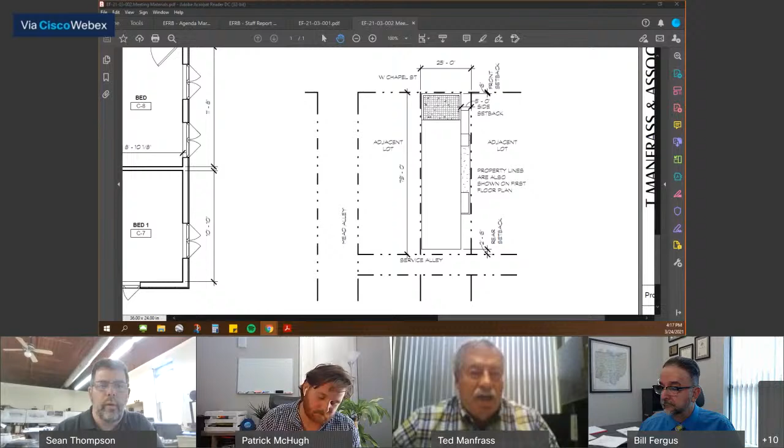I understand there are challenges to it, for sure. And to your point, I don't know where all that feedback is. Is that me?

To the point of the no parking and the lack of tree lawn, we did a project just west of this called Out of Town, and it does have, we set the building back so there's a little bit of micro landscape that addresses the sidewalk there. So, I understand the challenges, and it's not a typical condition, but I think there's an opportunity to improve the public presence even on a kind of narrow secondary street like Chapel.

And the warehouse is the only thing that has to be 19 feet wide. I'm talking about your warehouse kind of piece there. So you potentially could - I mean, the other thing to consider is the height of this building. If there's a desire to get more units in, could you go higher? I know that I'm unlocking a lot of variables, but...

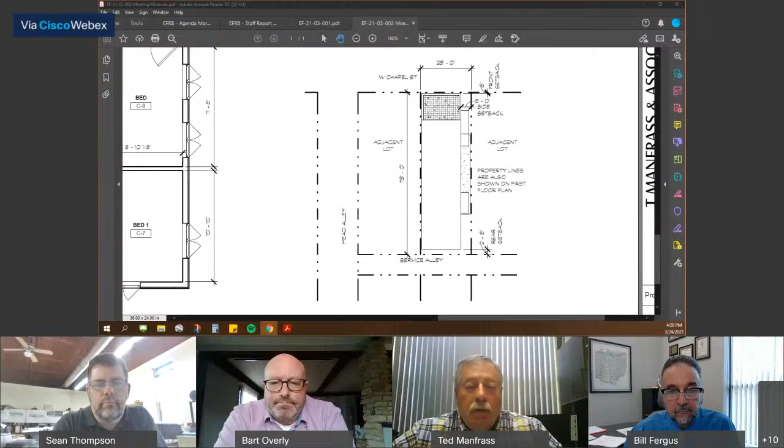Hey Ted, you might be on mute if you're talking, by the way. No, sorry. My assumption would be that alley...

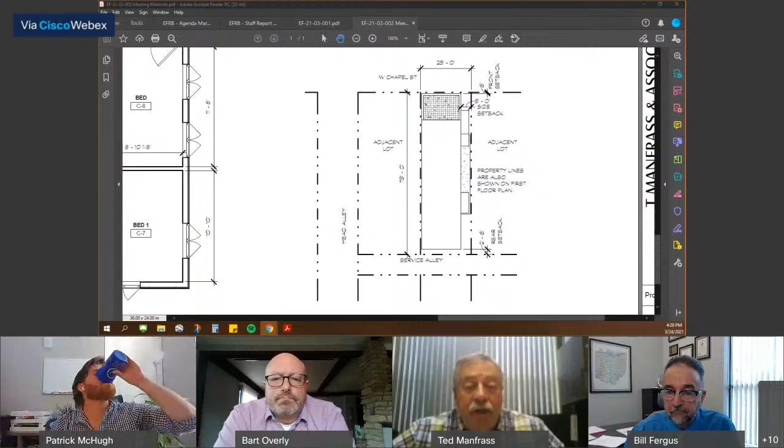50 or 60 years ago, or 100 years ago, when there were small houses on each one of these lots, it was a usable alley that people pulled cars in and maybe pulled into garages that were on the rear of the site. But since the majority of the houses have been torn down 30 or 40 years ago, that alley has now overgrown with trees. There's virtually no pavement left because of all the decomposition of the leaves and all the dirt debris that's blown on that alley.

So even though it's 10 feet wide, at one time it was probably a usable service alley. Right now it's not, and Pat would have to develop 60 feet or 56 feet of that in order to get access across his property. So I don't know what the dollars are, but it's money, obviously, that Pat probably didn't have in the original budget.

There was, I just thought it rang. My budget is tight.

If the door on the front were just a single door that was 8 or 9 feet wide, with a single door and not an overpowering 16 or 18 foot wide door, would one single door off the front be acceptable? The point was we were trying to make this look like a 60-year-old warehouse that had been sitting there for a long time, with windows with very small panes and muntins to look very industrial in nature on that front 40 feet of the building.

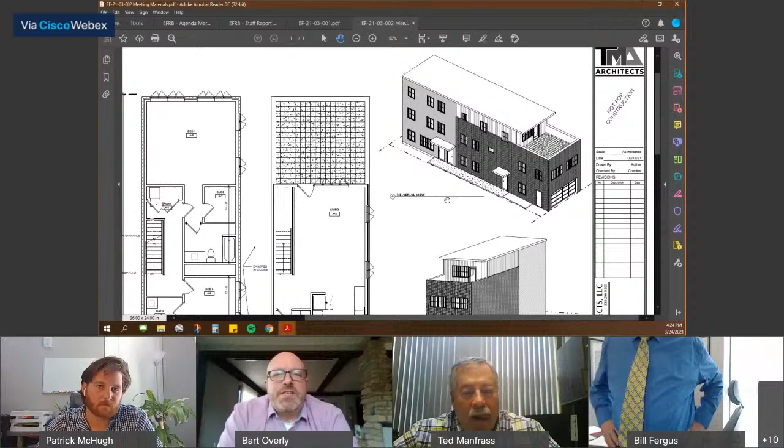How about making your building 15 feet wide, like the shotguns in German Village, and then you have a side yard you could use, where you could get a curb cut—not a 19-foot curb cut, but one where you could get one vehicle and stack 2 vehicles deep, not even have a garage.

What do you think of that, Ryan? I guess I'd have to say this is unfortunate. Being a developer myself, it's unfortunate, but this is kind of one of those chicken-or-the-egg situations. There's a lot of vacant land there, and our job as a board is to look at what's best long term for the neighborhood. There is a lot riding on what happens with Nationwide, what goes around there. But if we're asked to look at this in a silo of one property, the answer to me is a garage off the back. If this is combined with more, there are other options. Unfortunately, that's the view I have to take as a member of the board, looking at the long-term neighborhood.

It's unfortunate. I understand across the alley, I understand everything you're saying, Ted, but just to approve something because it's one lot within a big piece of vacant ground is not something I'd be prepared to do.

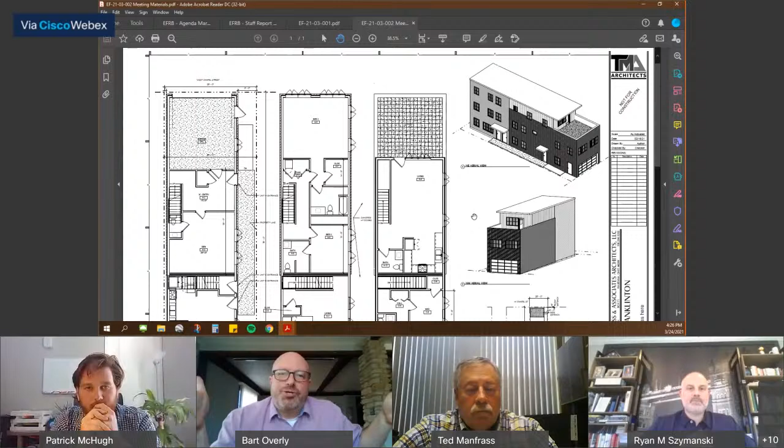I'll speak for myself—I could see entertaining it for this site, but I just don't like the idea of a 2-car garage given the width of that property. You could also have other kinds of entry—a smaller garage facing Chapel, an entry for one of your units above, maybe fronting that. So there's more interest than just a garage hitting it. I mean, it's a secondary street, but it's a primary avenue in East Franklinton.

Yeah, I can't commit to one without seeing it. The one thing I'd say that brings up is additional—now you're 3 units with parking for only 1 unit, whereas with this, there's the possibility of parking for 2 units out of the 3.

Would that work if it went from 3 units to 2 units, with a larger unit and the studio not having parking, or the small 1-bedroom? I think we're a very open board to concepts, but without seeing something and how it's laid out, I can't say yes or no to that for me.

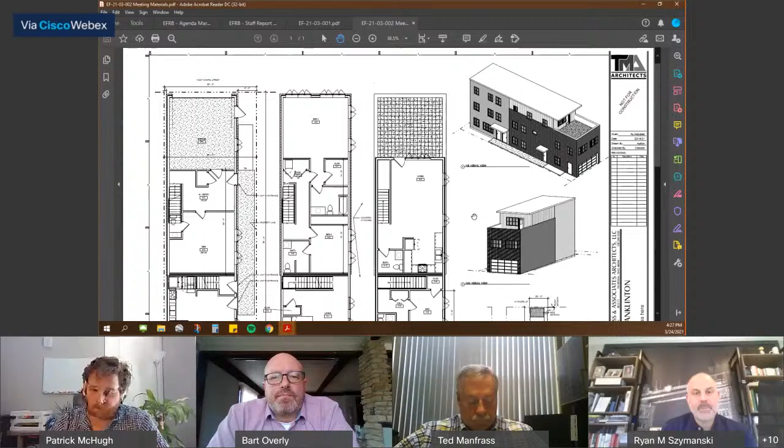There's also the safety factor of cars coming in and out of a garage on the front, where there's pedestrian activity, and that's another factor the board has discussed in the past. I would continue to say that any kind of parking access in that front is a problem to me.

It's an interesting site that requires a super creative solution for sure. We're not limited to strictly residential in this zoning area. One thing we could look at would be to take the front area of the building and turn it into a gallery space or some type of commercial space, and then do the residential to the rear and above, creating something much more open on the ground level.

Okay, I think we've got good feedback. We need to step back and take another run at it. It's possible we could recess the rear of the building 10 or 15 feet to get into a garage but keep the upper floors the same depth. That 10 or 15 feet pretty much takes the efficiency unit on the back of the building away, but we'll have to go back and look and see how that works.

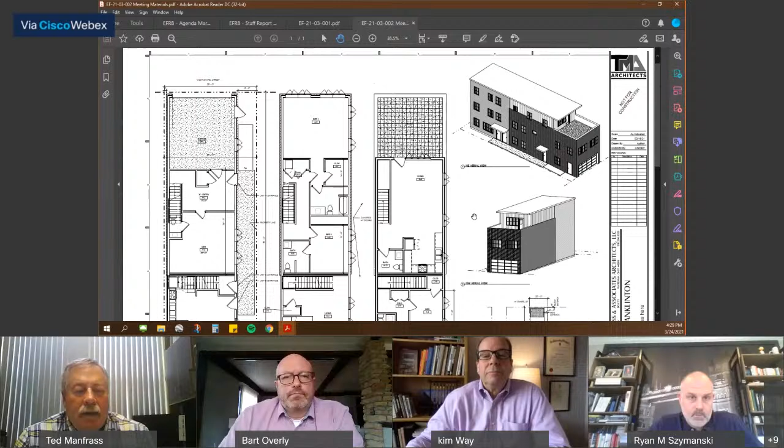Yeah, no, thank you everyone. I appreciate all the feedback today. Thanks, good luck. Yeah, good luck. Look forward to seeing you again. Yeah, we'll be back. Thanks.

All right, Bill, you're on mute. Darn, how'd that happen? Okay.

Belkis, you're going to give us an overview of the land bank owner occupant program?

Yes. So I was speaking with John Turner, who you all know at the land bank or the land redevelopment office. Their division, the division of land redevelopment, is going to be listing a lot for sale, so they're in the process of that right now. That lot is at 494 West Rich Street. It's a small lot, about 25 feet by 100, and it's very close to, or across the street from, the River and Rich 2 proposed development.

I think we saw a conceptual application for it last year. The applicants for this lot that's for sale are encouraged to apply under a new program called the Owner Occupant Program, whereby buyers who agree to build a house for themselves, directly hire a builder, and commit to living in the home for a minimum of 5 years will get priority and 50% off the price of the lot. The idea is to reduce the price of housing by cutting out the developer and having the buyer work directly with a builder without any developer markup.